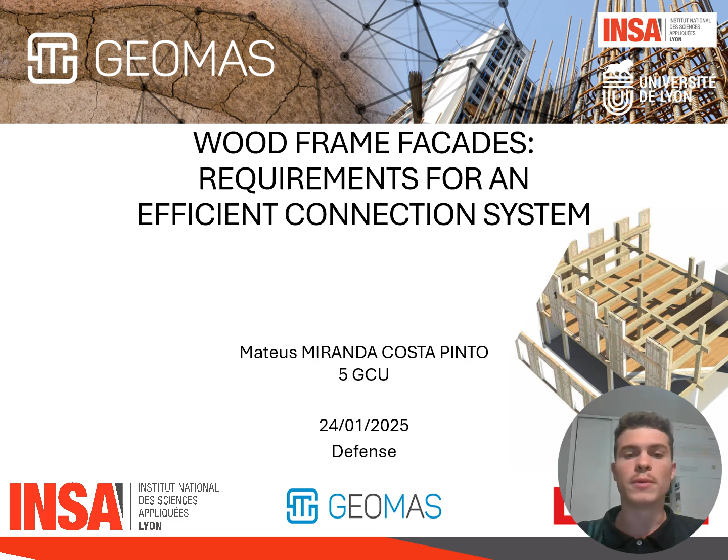Hello everyone, my name is Mateus Miranda and I'll present to you today the research entitled Wood Frame Facades Requirements for an Efficient Connection System.

As a student of the fifth year of Civil Engineering and Urban Planning Department at INSA Lyon University, I was supposed to do research with Sir Fabien Delhomme from INSA and GEOMAS lab, teacher and researcher, and with HILTI France, a partner of INSA, represented by Yannick and also by Alberto Martin and Gaël Le-Bloa.

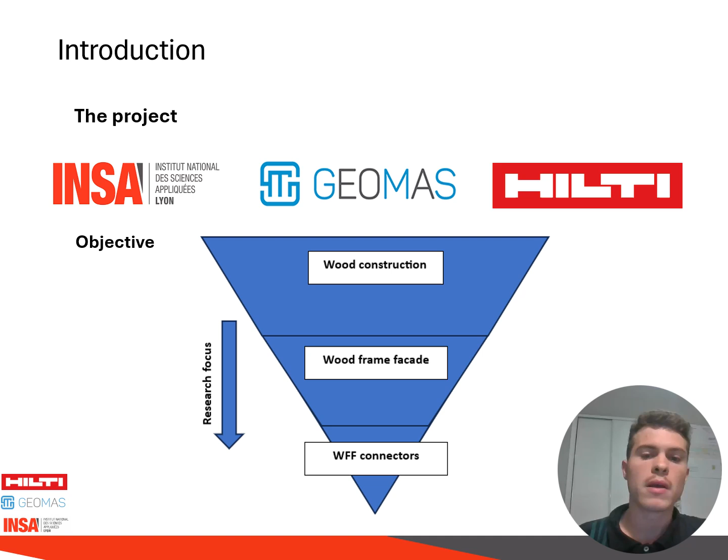We started this research with the objective to define the main requirements for a system of connection for wood frame facades. For that, we needed to understand wood construction itself, wood frame facades, and then enter into the details of their connection systems.

The steps were as follows: a first stage with more theoretical subjects, reading publications and a lot of standards to understand the theme.

After that, we had a second stage with more practical work, with the development of solutions, engineering thinking and calculations to validate them. Happily, we could have a site visit to see in practice the wood frame facades being installed.

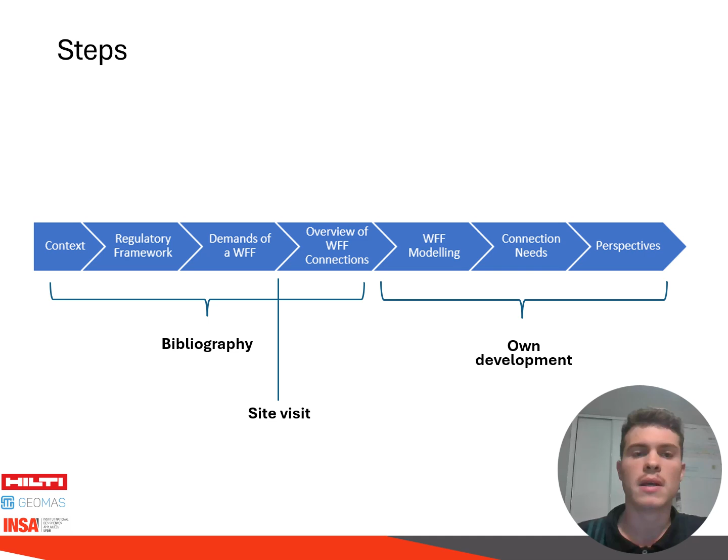We also visited a factory where they are produced, from the enterprise Alois, where Sir Pitron welcomed us and was very useful to help us understand the processes.

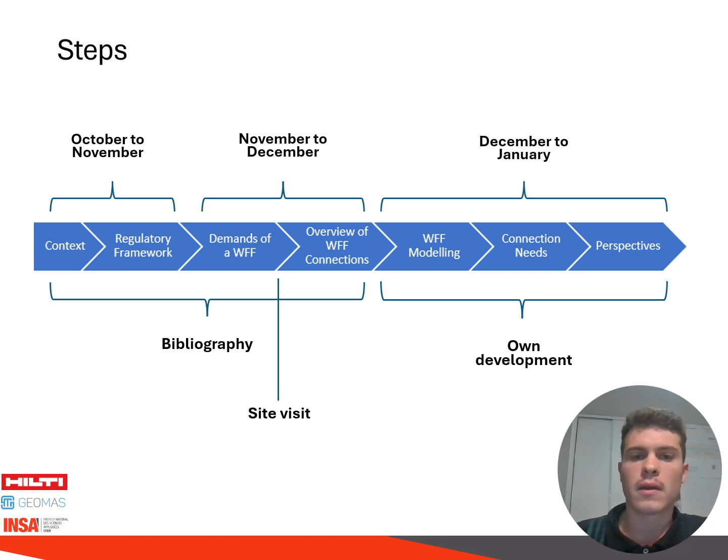The research lasted from October 2024 to January 2025, so 4 months of work.

Starting with the context, it's important to know why to talk about wood construction. Firstly, we understand that before the Industrial Revolution, wood had supremacy among materials chosen for construction.

Then, with the advent of steel and concrete, it changed, and the use of wood decreased a lot. But in recent years, with environmental subjects being added.

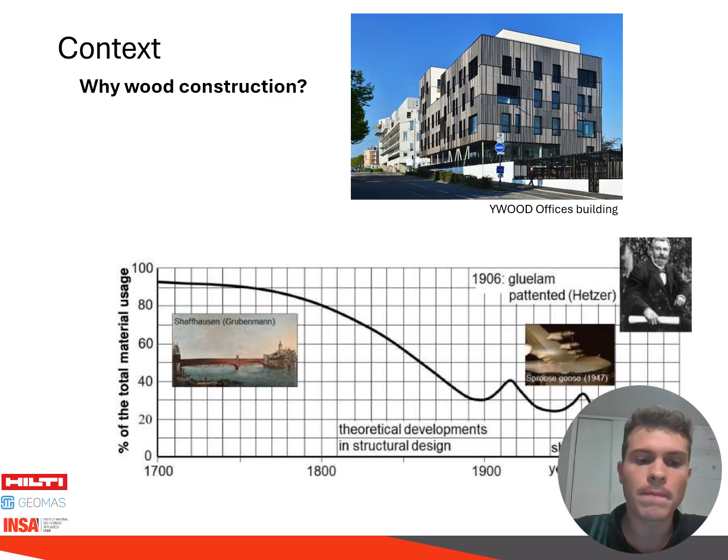to the multi-criteria analysis necessary to choose a material for buildings, we started searching for other materials because steel and concrete are very pollutant, and wood stands out because it comes from a renewable source.

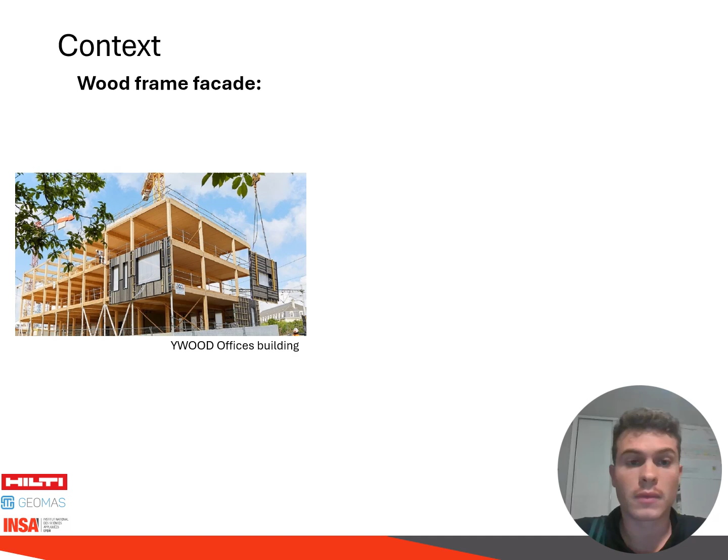More than structural elements, wood has other purposes in civil construction. For example, building facades, which are elements that separate internal and external environments.

In the case of wood frame facades, we generally have as main components their own structure, made by studs and beams, insulating materials, rain screens and vapor barriers, and internal and external claddings.

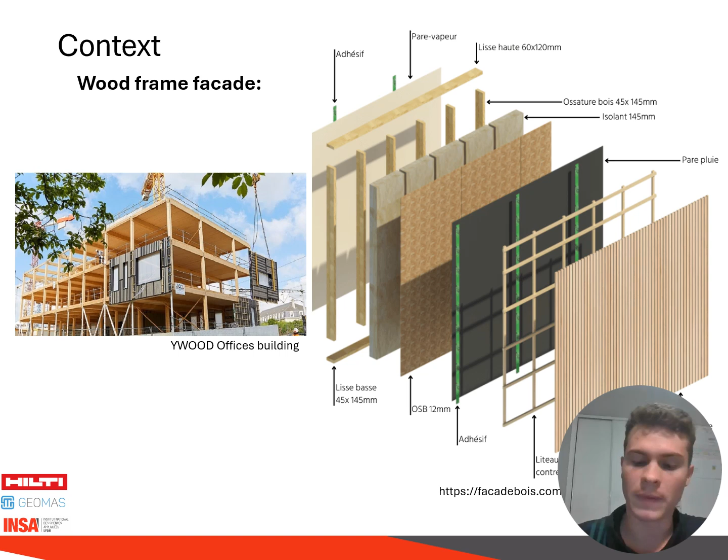The panels can be fixed to the structure mainly in two ways: firstly, being hung in front of the structure, or being just leaned against the edge of the structure.

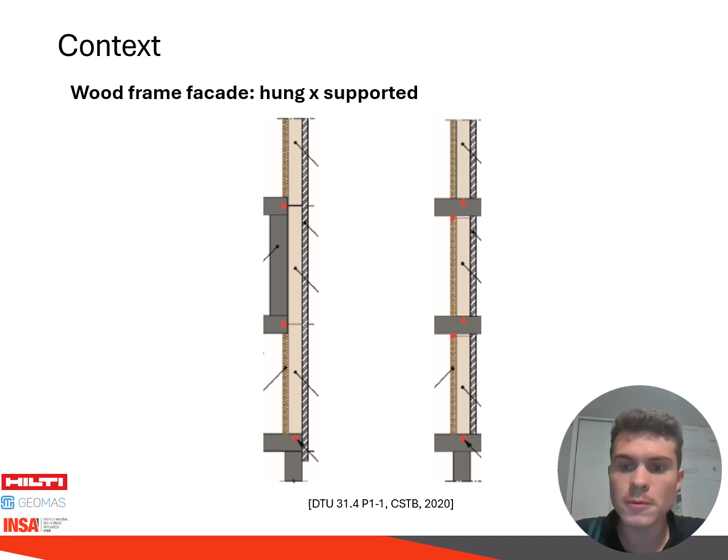This is very important because it directly implies the way we fix the panels, and the connection systems between them and the structure are our focus here.

Then we started looking into the wood frame facade demands to understand better what they need. Firstly, we understood the mechanical importance of the panels.

They don't have a structural function in the building's overall functioning, but they need to transmit all the efforts, all the loadings they have, to the structure, and not to their neighboring equals, only to the structure.

These loadings consist, for example, of their own self weight, the climate loadings that arrive at the facade and should be transmitted to the structure, and seismic events that generate loadings that should also be transmitted.

We have the fire subject too, with the notion that we should design elements of a building that do not contribute to the spread of fires.

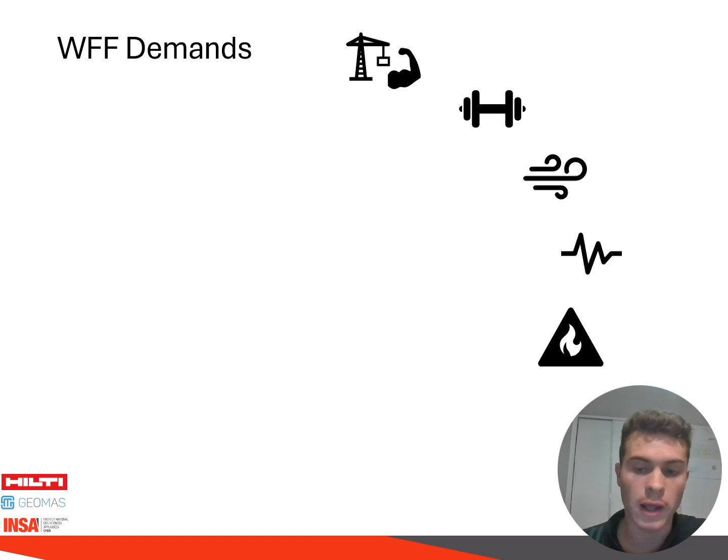It's important to have a structure that is easy to install, easy to maintain, and also easy to dismantle if we think about circular economy, with the necessity of replacing pieces of a building without breaking them when we take them off, to make possible their use in the future for other purposes.

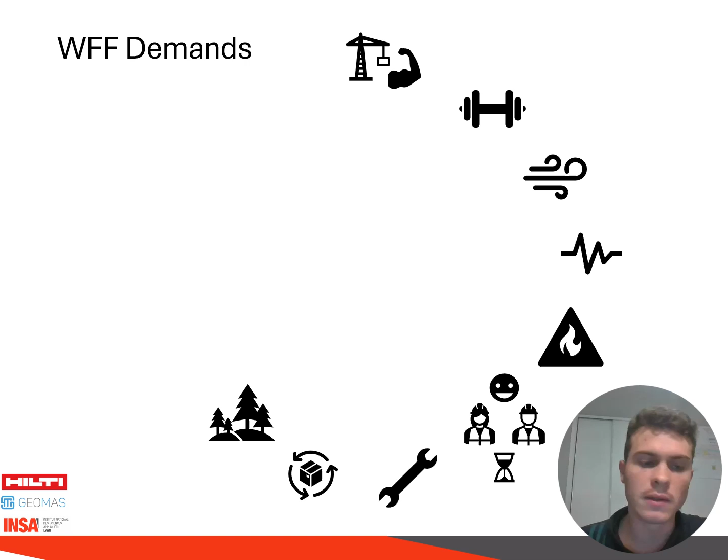We have the environmental subject, as we said, which is very important. The production and installation of the panels should not be too aggressive to the environment.

We have the costs, which are always a key factor for building components. We know that panels should have a plausible cost to be used.

Coming back to nature, we have the sealing properties that are important for facade elements, because we should avoid air and water penetrating. So the facade elements should be airtight and watertight.

We have insulation properties also concerning both thermal and acoustics, which is very important for facade elements.

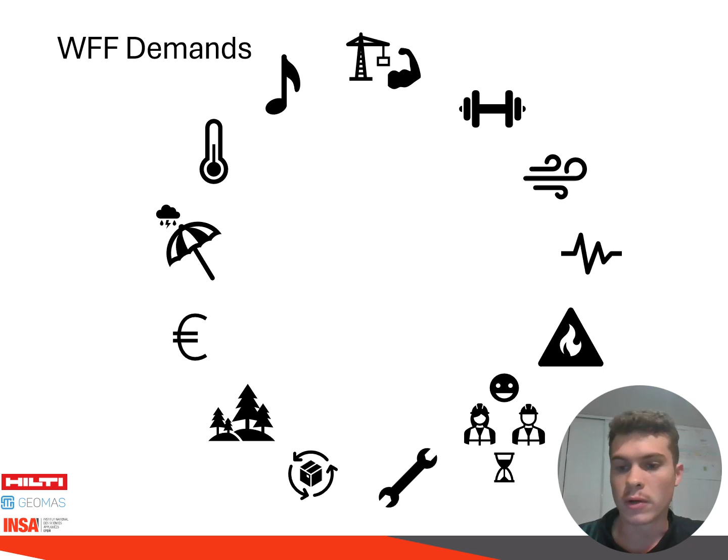Mainly due to these three last items, we see mainly the use of the first type of fixation, because that generates a continuous facade that is more manageable concerning insulation properties.

Because if we had the interruptions as we see in the second type of fixation, it would be harder to manage the bridges that it generates, the thermal and acoustic bridges. Then we see more commonly the first type, and it is this type that we will consider for the research.

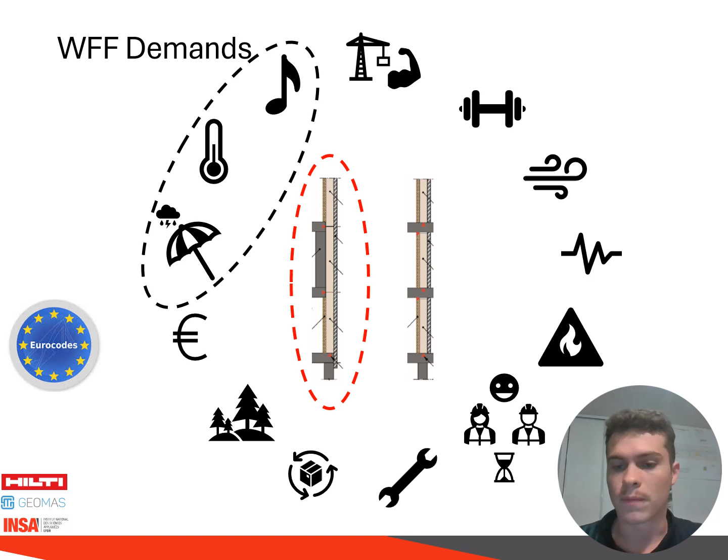To understand all these demands, we needed to read publications, but also we took a look to the Eurocodes, that are the standards with the most guidelines for buildings in Europe, and also the DTUs, the Unified Technical Documents, for French guidelines.

Then we searched the ways to fix wood panels, wood elements to the structures, and we saw that mainly we have two ways: with or without metal intermediates.

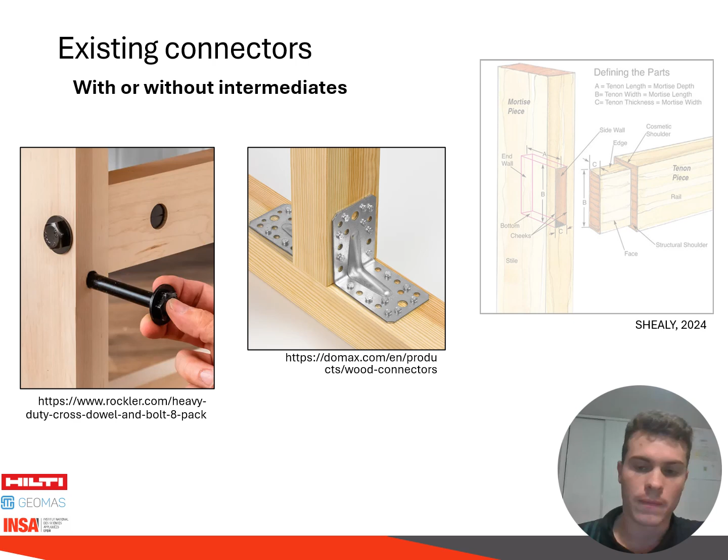Then we focused on the metal intermediates that are more seen in the studied cases. We searched commercial solutions with existing systems of connection that can be used to fix wood frame facades and also other similar types of structures.

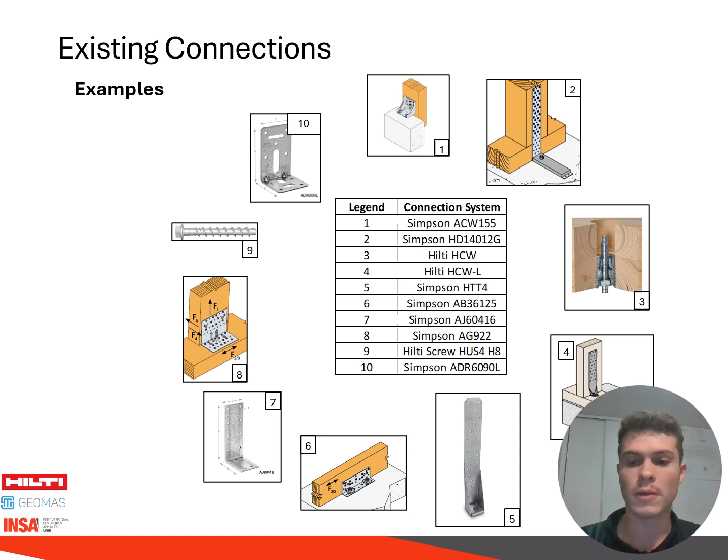Then we analyzed it too. It's not the focus here, but in the research report we show comparisons between them, mechanically and geometrically, to analyze how they work and their objectives mainly in terms of mechanical things. This was very interesting to better understand the major impacts a connection system has on the wood frame facade in general.

Talking to professionals, we understood that the cost is not negligible. We have 5 to 15% participation in the overall budget of the panel due to the connection system, because it's still expensive. But sadly, we didn't find much data about the economic part of the wood frame facade, nor about the systems of connection.

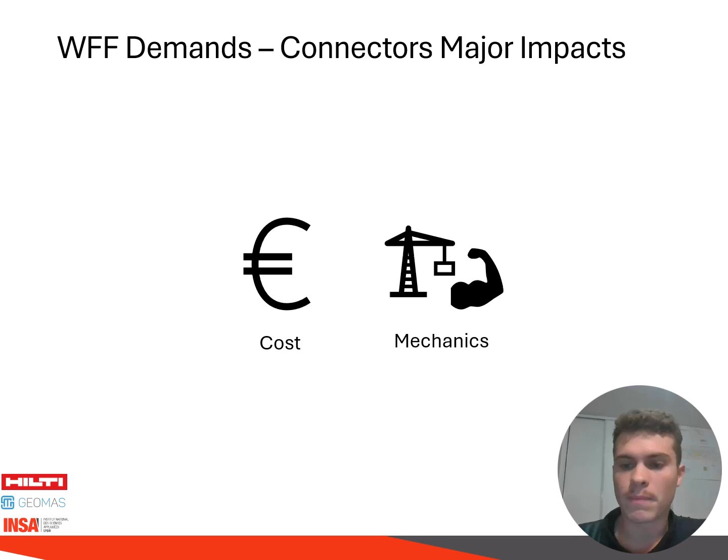Then we will focus on the second major impact that we understood, the mechanical part. That's very important, mainly due to the transmission of loads that should be made by the panels, passing through the systems of connection. Then analyzing it with more detail, firstly setting the loadings that can happen in the facade.

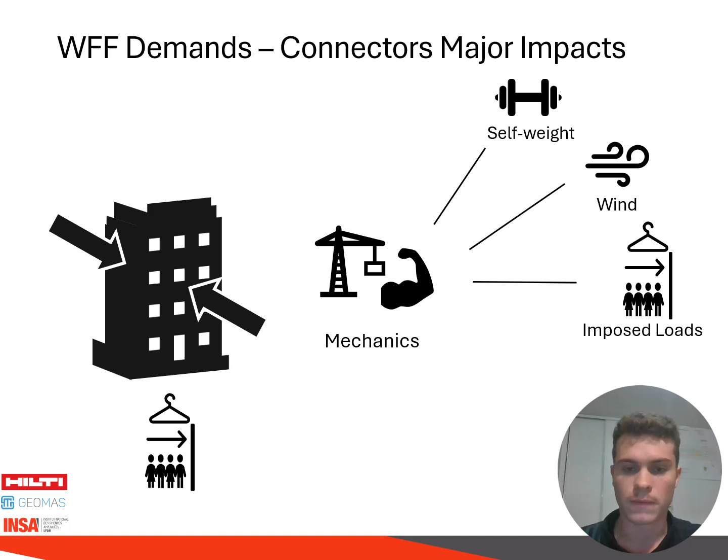We have firstly the self-weight that works vertically on the facade. We have wind that comes perpendicularly, but with other components as we'll show. We have imposed loads that simulate furniture held in the internal part, or people pushing the structure, generating perpendicular loadings too.

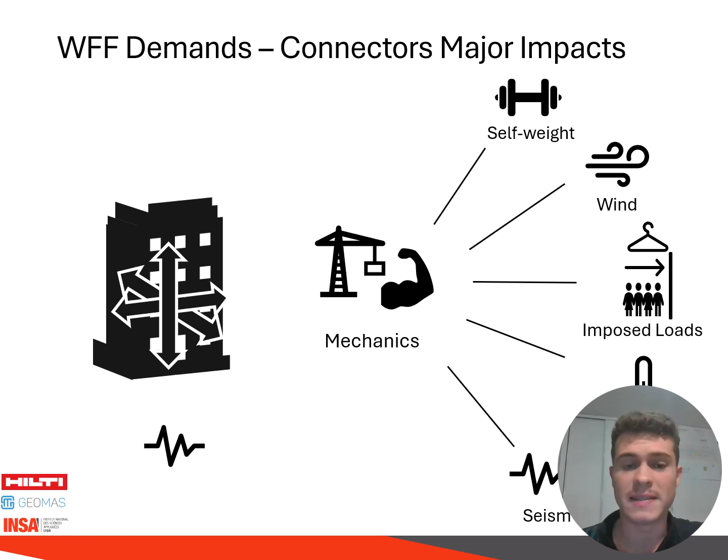We have thermal expansion that arrives in both directions of this two-dimensional panel element, horizontal and vertical, generating loadings because of the friction it causes. And last but not least, the seismic events that can generate loadings in three directions.

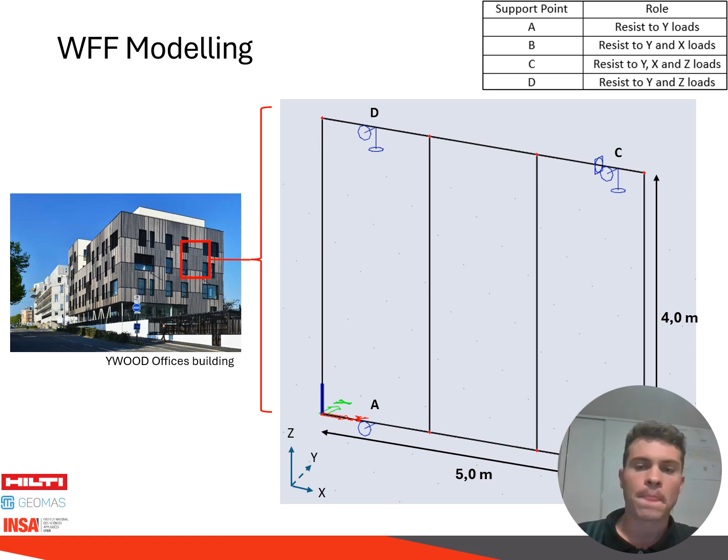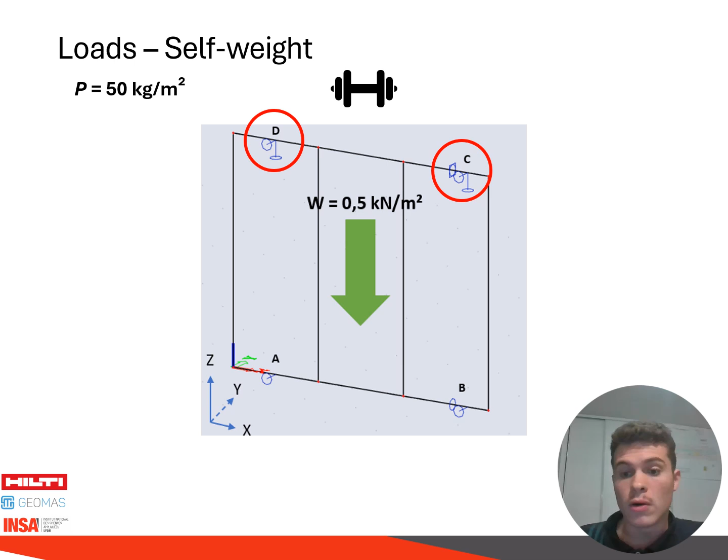Then, better analyzing the loads themselves, we have the self-weight that comes from the material properties with a weight of 50 kilograms per square meter, generating a loading of 0.5 kilonewtons per square meter. That is all held by the top points of the panel, C and D.

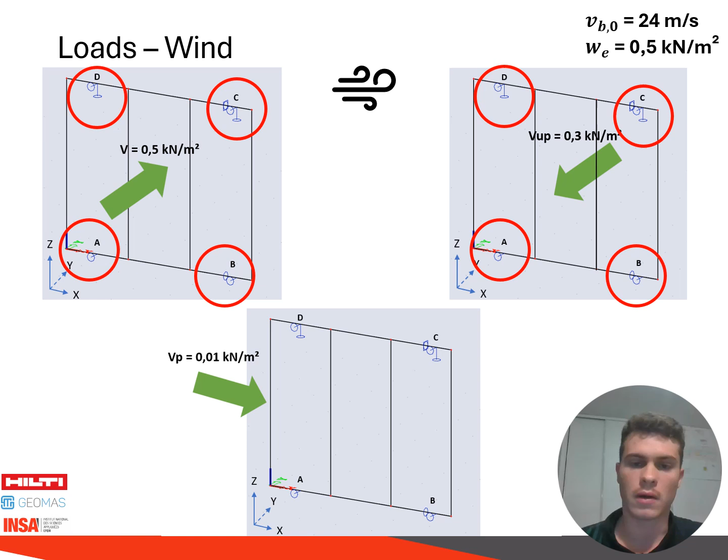And we have also a parallel component that is much lower, but exists too. With this, we can understand that all the support points hold the perpendicular loadings because all of them are fixed through the y-axis, as I said. But the parallel one is held only by the right points, the support points that block the parallel displacement of the facade.

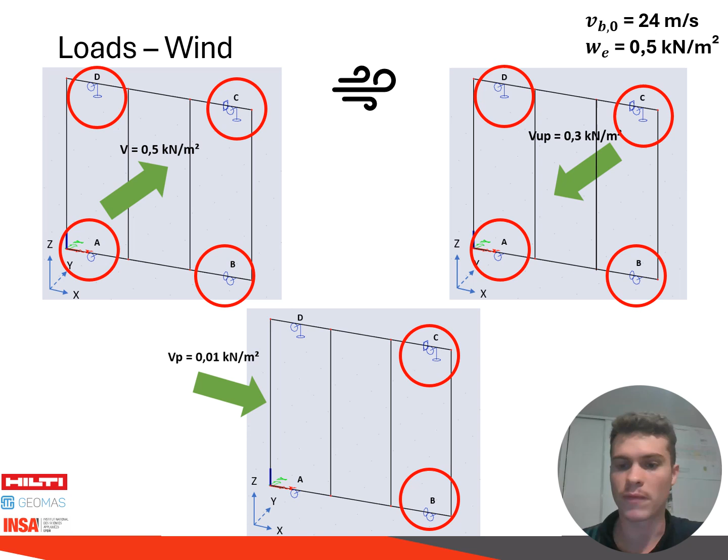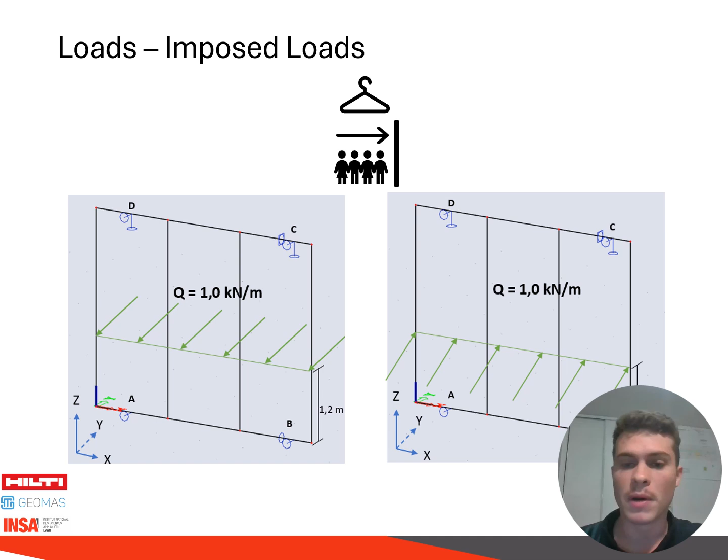We have the imposed loads that come from Eurocode 1 with the linear distribution, with a given height. As they are perpendicular to the facade, they are held by all the support points. We have the thermal expansion that depends on the direction.

We have the expansion in both directions, X and Z, and for each of them, we have loadings generated by the friction of these points. That depends also on the normal effort they have, and because of that the values are different. And that depends also on the displacement the element of facade has.

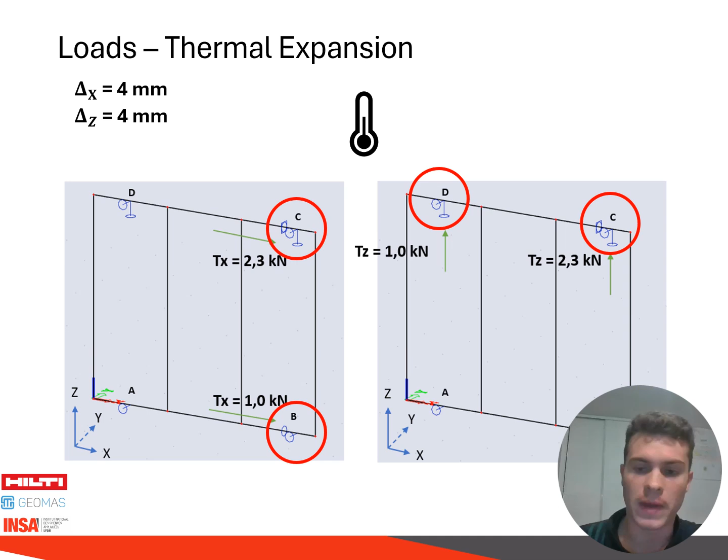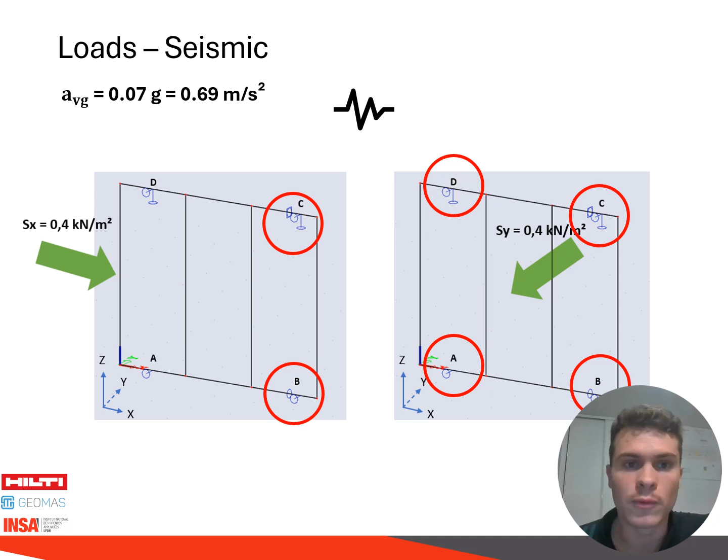And then we understood that there are three main mechanical functioning answers that the systems of connections should address: the strength, firstly, to resist all the loadings shown; the adjustments during the moment of installation; and the expansion gaps, which are the possibility of movement of the parts of the panel that should be free so as not to generate more reactions than we expect.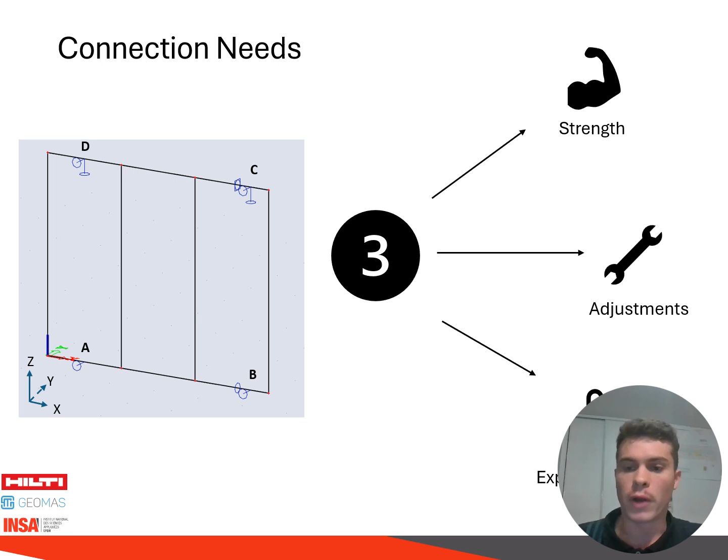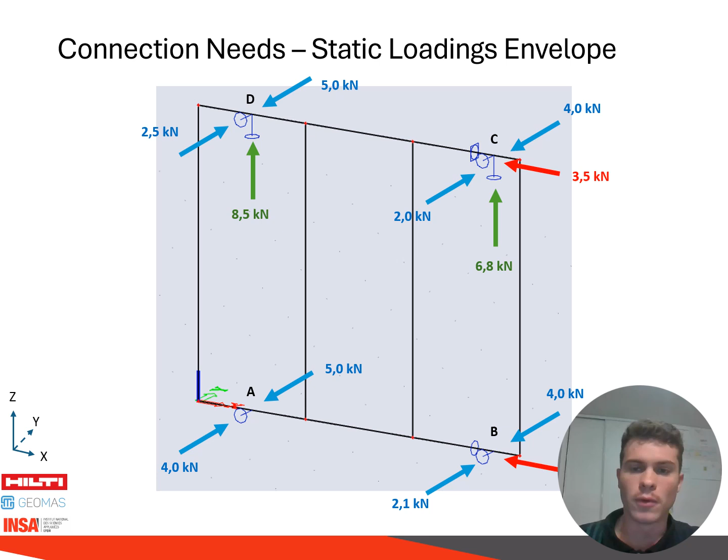About the strength, we have the envelopes that we can make with combinations given in the Eurocodes. That is a lot of situations that vary in terms of conditions of happening and coefficients we consider to search for the worst case - the most unfavorable case of loadings that the systems of connection, the support points, should resist. That implies directly in the sizing.

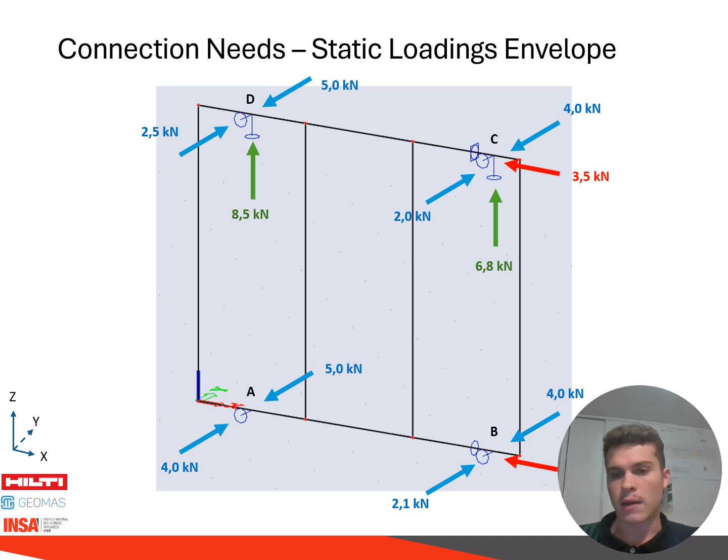First you have the static loadings envelope with these loadings. It's important to say they don't occur concomitantly, but at some point they can happen, and because of that they are the ones we should consider for sizing.

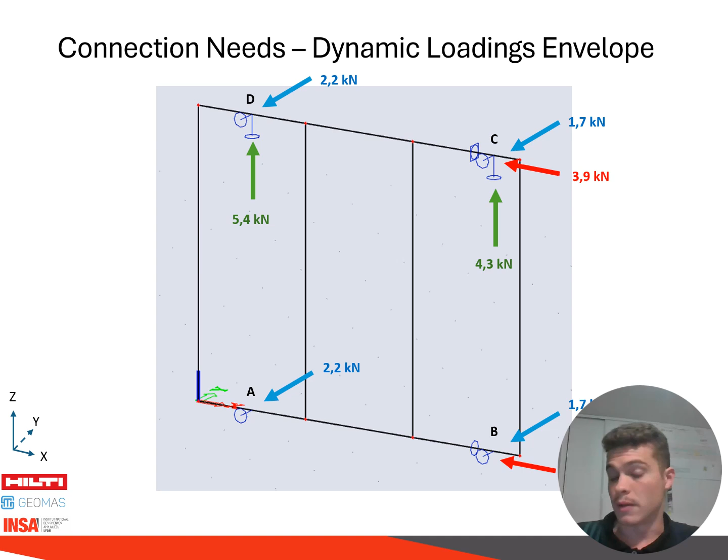And the dynamic loadings envelope considers the seismic events - we have similarly the envelope that is generated, which should be considered in the sizing process.

About the adjustment requirements, we saw that before installing a panel, we should verify the structure we have, to accept it or not, because the structure is not perfect. It has irregularities, and we should verify, according to different checks, if we can accept the structure and then install our panels or not.

With the limits given by the French document DTU 31.4, we looked for the worst cases - where the irregularities are at their limit of acceptance - and with that, with our dimensions, we could verify the length of adjustment required for the three directions, which varies from 10 to 13 millimeters, as shown in the image.

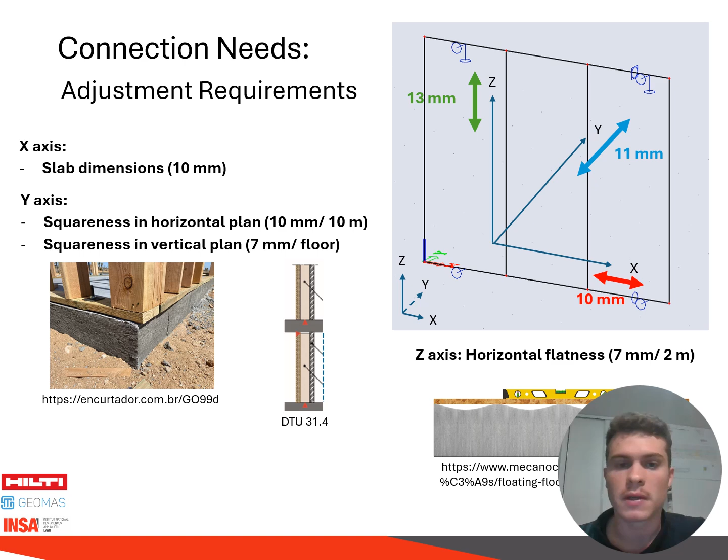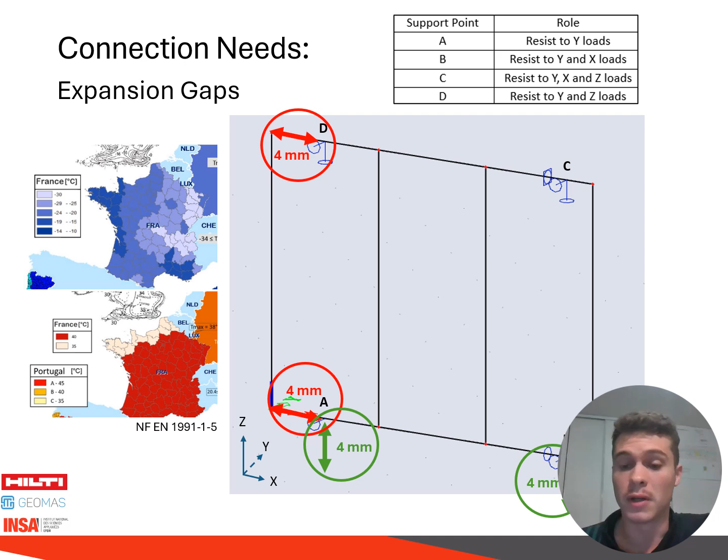Talking about the expansion gaps, we have the thermal variation, the temperature variation that also varies according to the region. Here at home, we have around 70 degrees of variation that we should consider. That generates, with our dimensions, around 4 millimeters of displacement in both directions, X and Z.

Resuming, we have the strength that should be considered for the systems of connections in the horizontal plane - here we have the global envelope. For the horizontal plane, we have values varying from 2 to 5 kilonewtons that should be resisted by the system of connections, and higher values for the vertical reactions at support points C and D, varying from 6 to 9 kilonewtons.

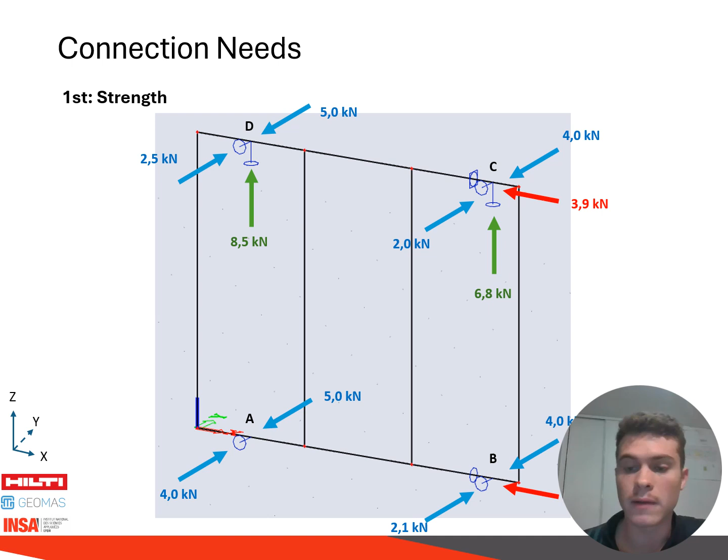About the adjustments, we have lengths from 10 to 13 millimeters, as I said, that should be considered for all support points, because the irregularities don't choose one specific place to happen - they can occur anywhere. Then all four support points should consider these adjustment requirements.

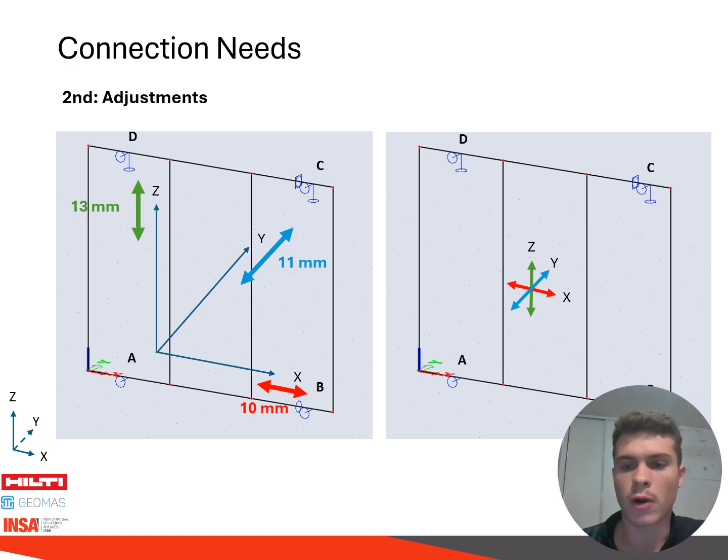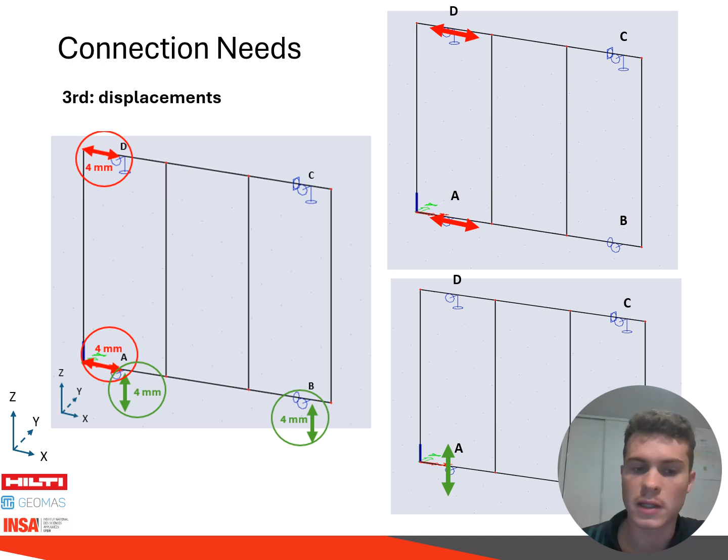And for these expansion gaps, we have two cases. Firstly, the horizontal displacement that should be carried out by the left points, A and D, and we have the vertical displacement that should be carried out by the A and B support points.

Then what do we propose? A solution, not necessarily, but solutions. That is a combination of brackets that are complementary between each other.

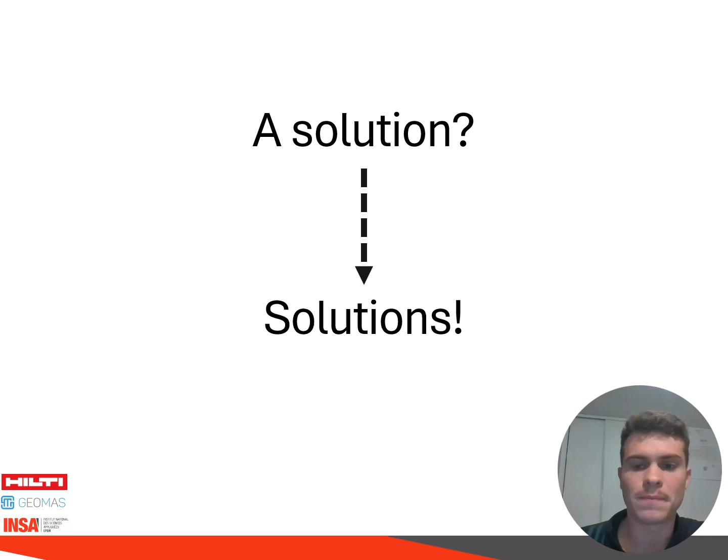Firstly, we have type 1 with a horizontal plate that should be fixed to the structure, and a vertical plate that should be fixed to the facade.

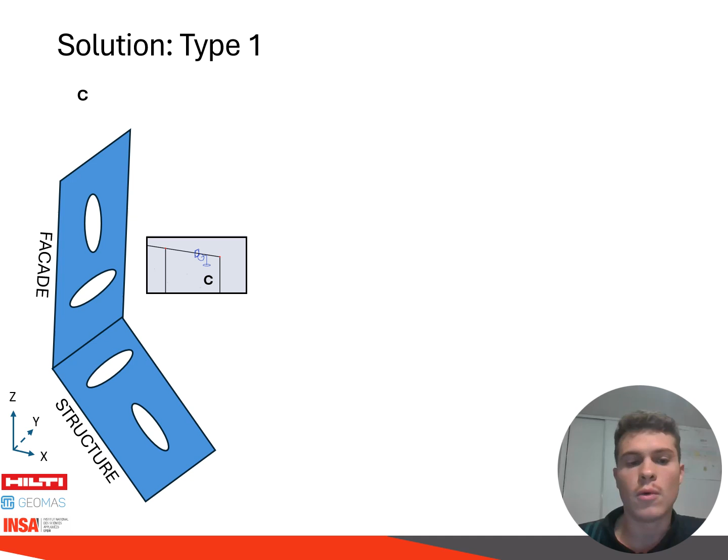If you take firstly the strictest case, that is support point C, we can use the horizontal plate to fix the bracket to the structure using the oblong holes that we have to adjust to the Y and to the X axis. And in the vertical plate, we can fix both also, because we are in the strictest case.

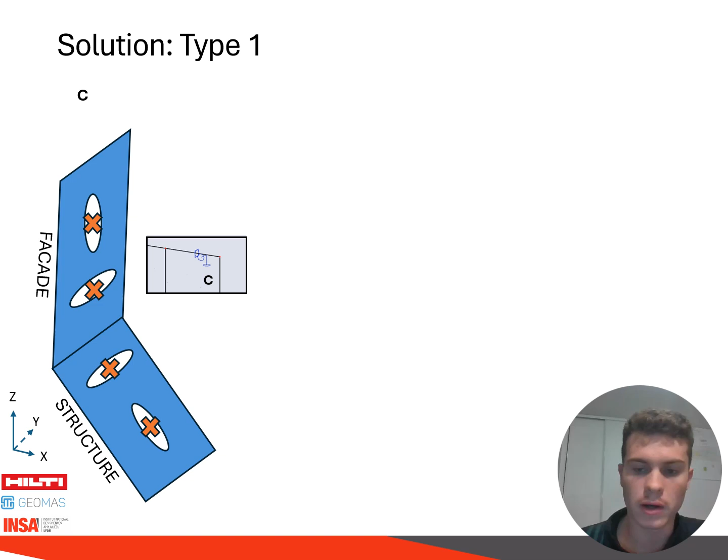Then always block it. We can fix in all the holes. If we look at support point B, we should let displacement in the vertical axis.

Then we should not use both holes of the vertical plate. We should use only the top one, because with that we can allow displacement in the vertical plane, but not in the horizontal plane.

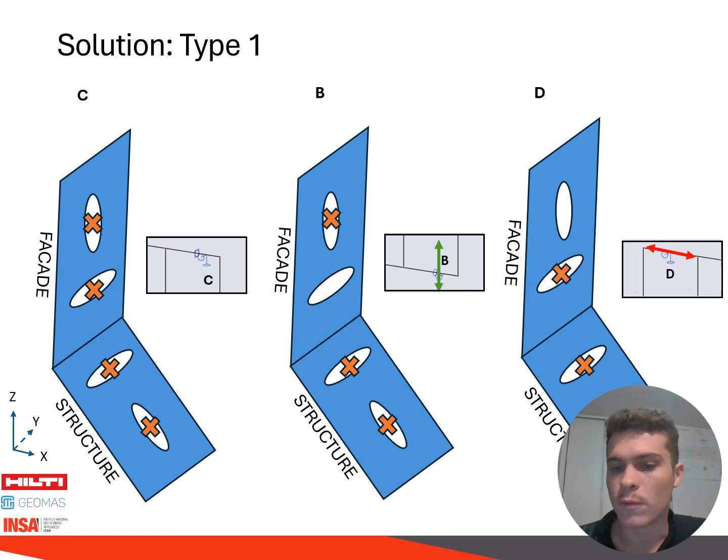The inverse happens at point D, where we should let the horizontal displacement, then only the bottom of the hole of the vertical plate should be used by a screw that will be fixed here. But it's different for support point A.

It's more complex. It should allow both displacements through the X and through the Z axis. And to do that, we do not propose two different holes, but one bigger hole that can allow both displacements.

Then we can use again the structure part of the bracket, that is the horizontal plate, to adjust through the Y and X axis during installation, and the bigger hole to adjust the Z irregularities that we have, but with enough space for displacing the facade through the Z and through the X axis, that the facade will be moved.

while the bracket is fixed to the structure and is stopped. It's very important to verify that the head of the screw does not pass through the hole, because we need to block the Y direction of displacement.

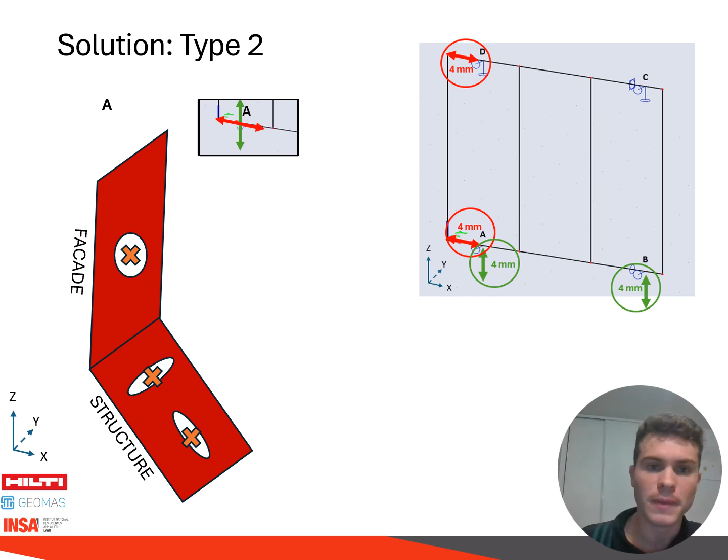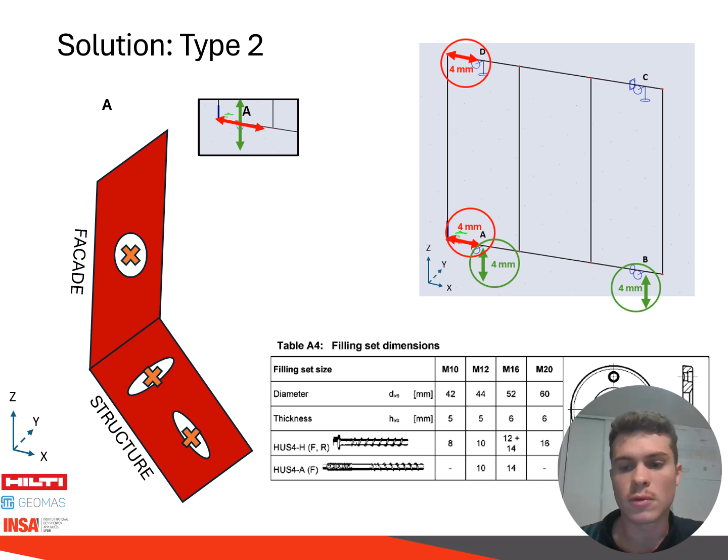As we said, all the points should block the Y direction. And happily, we found Hilti documented files that show it's common to have screws with a head diameter from twice to thrice the body diameter of the screws. Then it seems to be applicable to our case.

Resuming our solutions, we have two types of brackets. Firstly, one that can allow only the Z or the X displacements, but can also block both. And we have the second type that mandatorily allows both displacements in the Z and X axis.

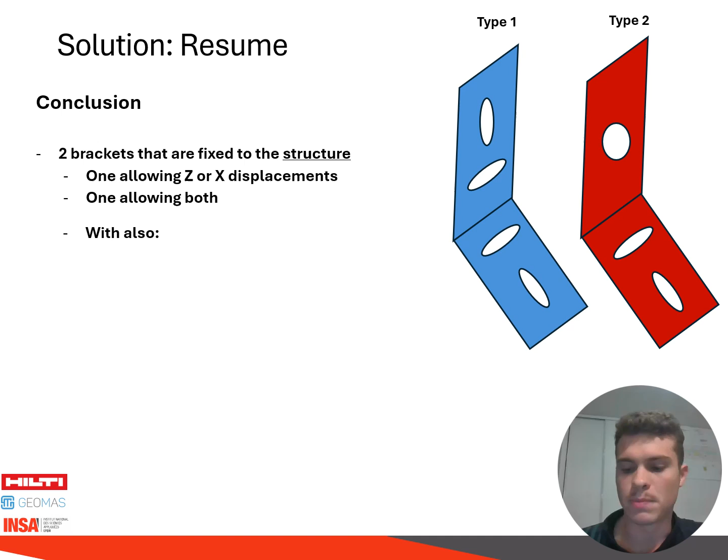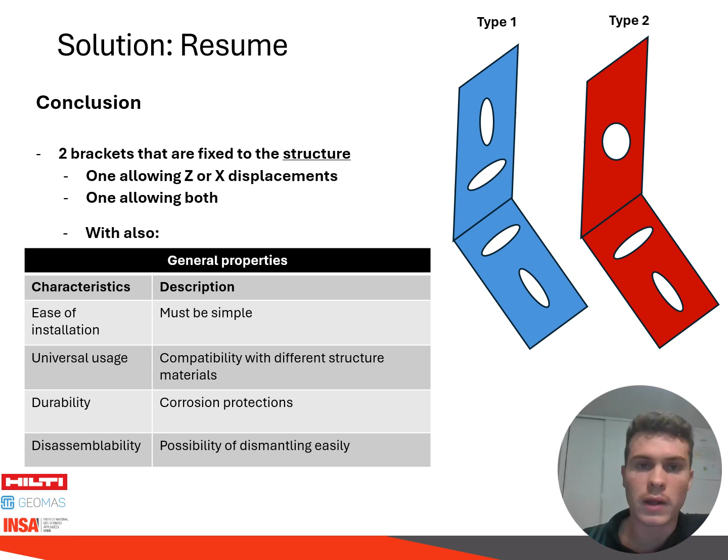We have also general properties with qualitative analysis described in the report: the ease of installation of the brackets, universal usage considering different materials of structures, the durability of the systems, and the disassemblability, that is the facility of accessing it to take off when needed without breaking the pieces, neither the facade.

Then to conclude, what we have as perspectives for this study, if it's possible to be continued: we would like to have a real sizing of the systems, because we didn't size it, we just pre-drew after understanding the demands, and knowing the right dimensions, the right thickness, the steel properties for the material of the bracket could be interesting.

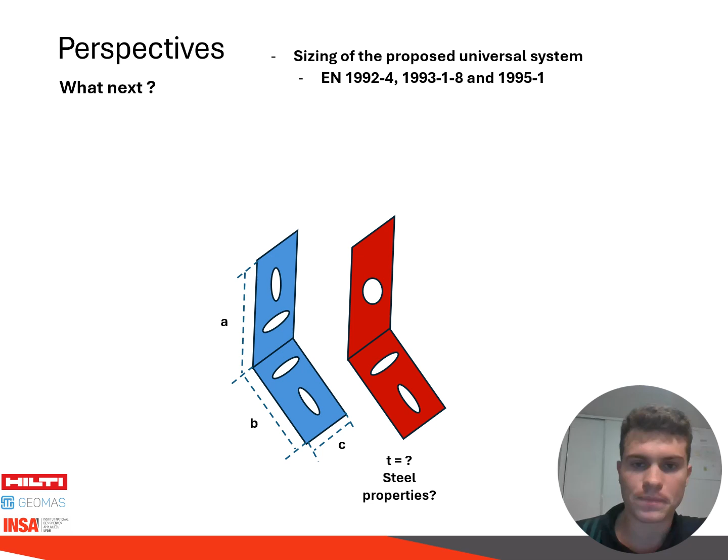And as we said in the research, using as basis notably the Eurocodes: the fourth part of the second one that covers connections for concrete structures, the first part of the third one that does similarly but for steel structures, and the first part of the fifth that covers wooden structures. With that, having parameters to size the brackets for all three types of structures.

Another thing can be the deepening of mechanical comparisons of the support points, that is adding or suppressing support points, or even changing their initial conditions to verify how it implies in the reactions, which are important points about the mechanical functioning of the connection systems.

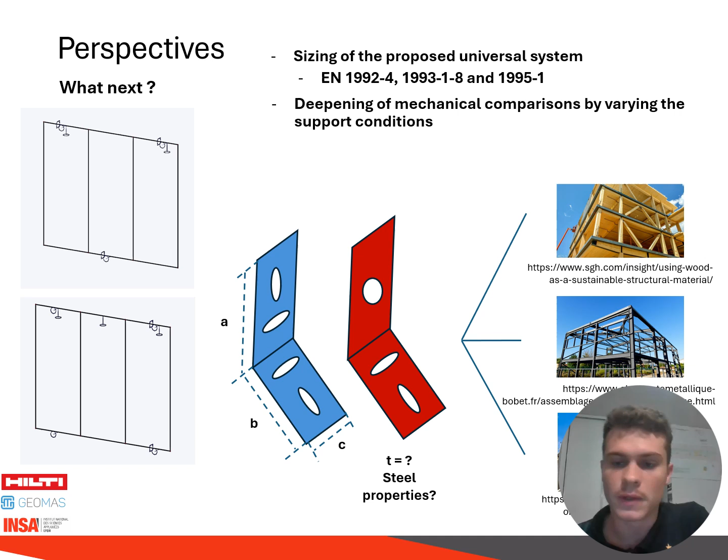And we have finally the study of the financial impact, firstly of the system of connections to understand their real role in the panels, but also the participation of the wood frame facade budget in the general budget of a building, that, as I said, I felt the lack of information available in the academic world.